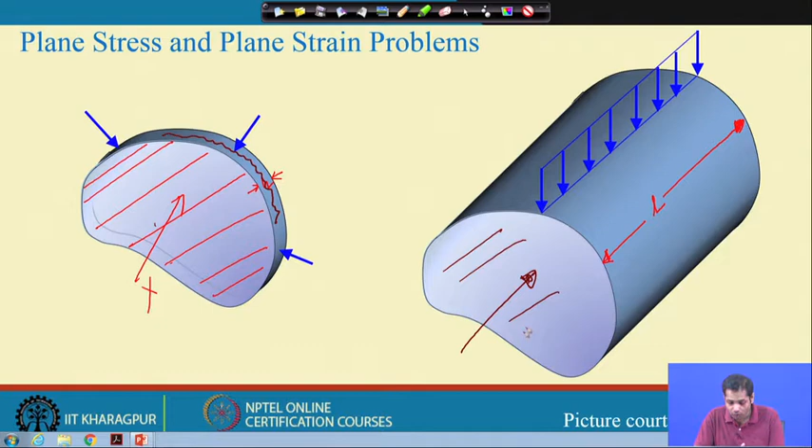Similarly, here all these loads are acting on this plane, so there is no load acting in the longitudinal direction. Again, there is no load acting in the thickness direction, meaning normal to this plane. Here also, normal to this plane there is no load. So the load is always acting in this plane. So, two things we can see.

One characteristic is that the thickness is very small, and the second is that one dimension is very large. In addition, the loading acts such that there is no load acting normal to this plane, normal to the thickness, there is no load.

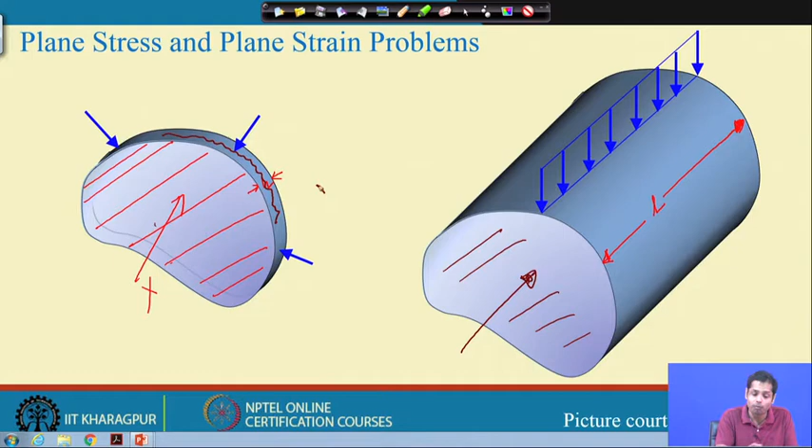For example, take a plate subjected to in-plane loading, in-plane tension or compression. The thickness h is very small compared to the other dimensions, and these loads act on this plane. There is no load acting normal to this plane. So loads act only on the plane.

Now, an example of an aerofoil. Here too, when we look at the vibration and dynamics of this aerofoil, there is no load acting normal to it, all loads act in this direction. One dimension is very large, but there is no load acting normal to it. If you apply load in that direction, things are different and you cannot idealize it as a plane stress and plane strain problem.

Now, what happens if you have a system or an object with this kind of characteristic? Let's start with the first case, and then we'll come to this one.

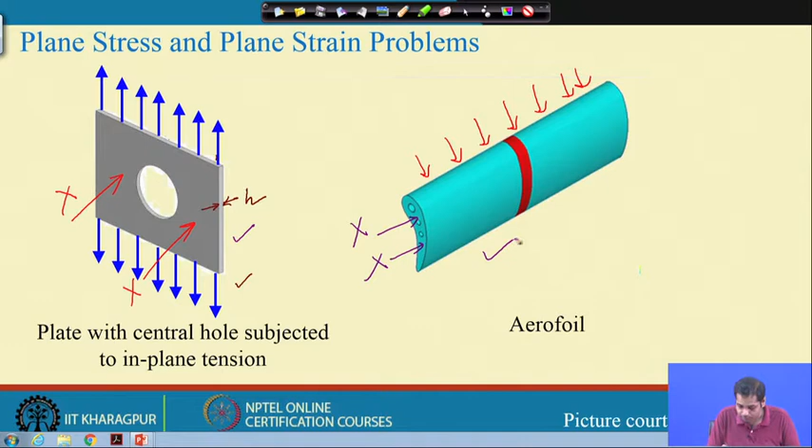Take any arbitrary object whose thickness is small, call it h, and h is very small. This is the x, y, z direction, and loads P1, P2, P3 are all acting on a plane.

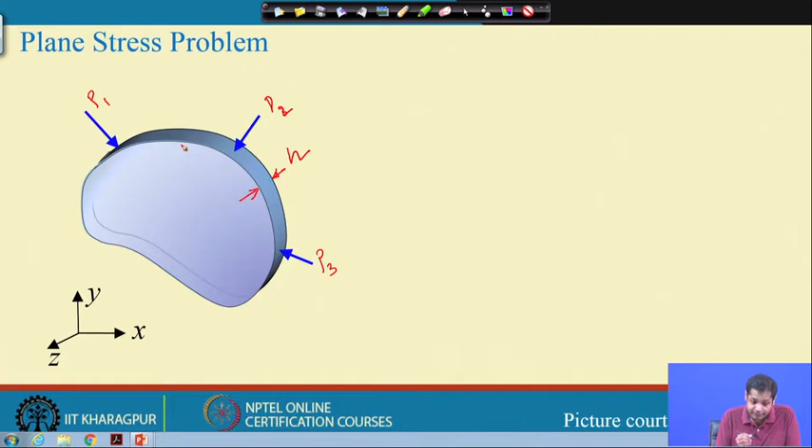Now take a small infinitesimal volume element and let us show the stresses on this volume element. You are familiar with how stresses are represented on this element, with this coordinate axis.

In this case, this dimension is very small. Recall that stress and strain have a pointwise description, so if you move from one point to another, their values change. Now, what happens if this thickness is very small? Then the change in stress in that direction, the z direction, is very, very small, so small that you can assume it is constant.

So if the change in stress in this direction is very small, we can assume it is constant. If this is constant, and if there is no stress on the surface, this surface is stress free, since we said stresses only act on this plane, there is no normal stress on this plane. Similarly, on the opposite side, there is no normal stress either, so that plane is also stress free.

So we say two things: first, the thickness is very small, so the change in stress along that direction, whether shear or normal stress, can be assumed constant with no change. Second, both faces are stress free, meaning there is no stress on those surfaces. This means that stress is constant, and on the surface stress is zero, so along that direction all components of stress are zero.

But if you apply a force on this surface, take this example of the mobile: if we apply a load like this and a load like this, on this plane there is no load in the normal direction. We only have load in this direction and this direction. So this surface is stress free and the opposite surface is also stress free, meaning there is no normal stress in that direction.

Along this thickness the dimension is very small, so there is no change in stress along it. There is no normal stress in the z direction at any point within this object. Therefore, at any point, all the components of stress in the thickness direction are zero, or small enough to neglect.

If that is the case, then this stress will be zero, there will be no stress in this direction, and this stress will also be zero. So all these stresses normal to the z direction vanish.

Now, if sigma xz is zero, then sigma zx also has to be zero, which follows directly from the moment balance equation. Similarly, if sigma yz is zero, then that component is also zero. So the only stress components we have, for any infinitesimal element, are sigma xx, sigma yy, sigma xy and sigma yx. All the other stress components are gone.

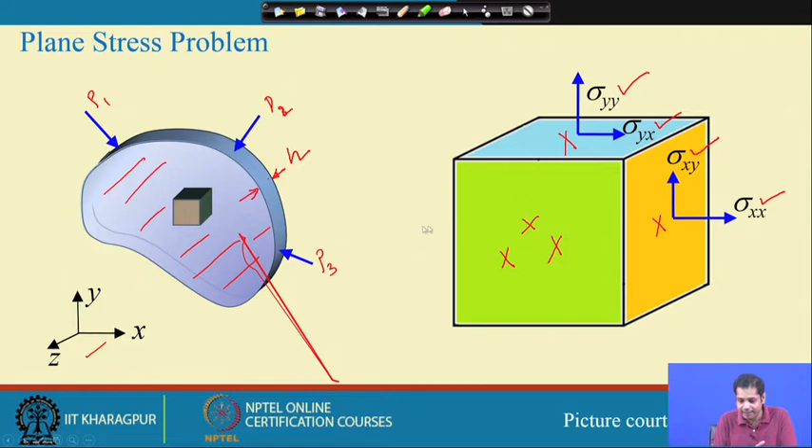Similarly, if we take the other surfaces, we again have sigma xx, sigma xy, and on this surface sigma yy and sigma yx.

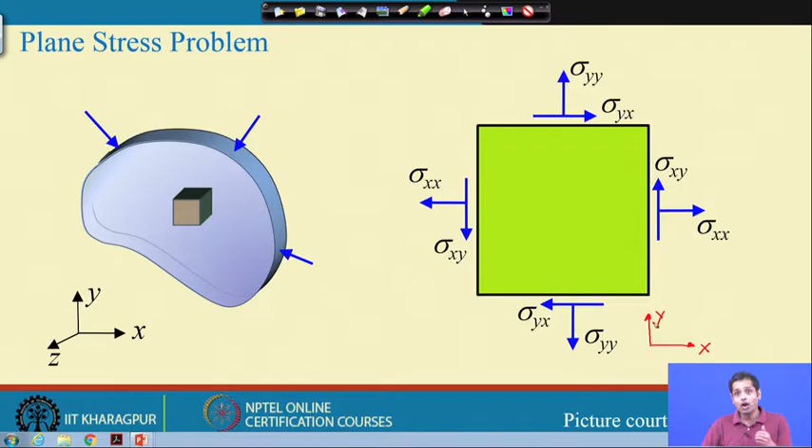So the stress state can be represented like this. Here, normal to this plane is the z direction, this is the x direction, and this is the y direction. All these stresses exist only on that plane, with no stress normal to it. Therefore, all the stresses are confined within that plane.

That is why this kind of problem is called a plane stress problem — the stress components act only on a plane. Remember, this is still fundamentally a three-dimensional problem, but it can be idealized as a two-dimensional problem. When idealized this way, the number of stresses and equations you must deal with is reduced, making the solution relatively easier.

When you make that idealization, if the assumption is actually applicable to that particular problem, then the solution you obtain reasonably represents the solution of the actual system.

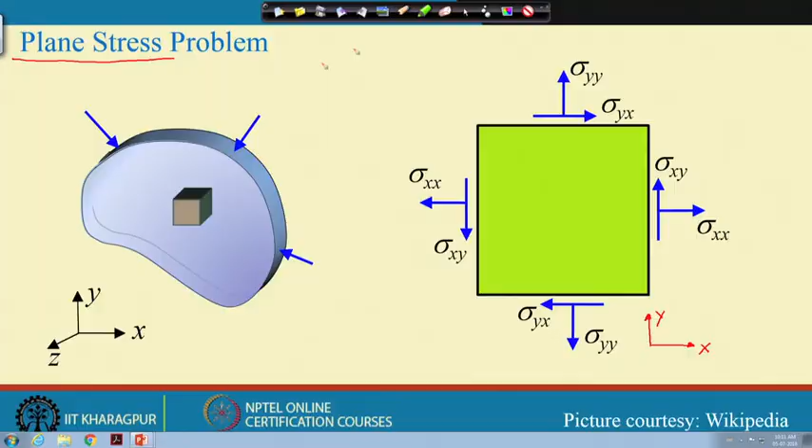Now consider another case. What happens here? Again the condition is that one dimension is small and one is large — but that is not a strict requirement. In such cases you may often find this, but you must decide whether stress and strain in a particular direction can be neglected regardless of whether the dimension is large or small. It also depends on the loading system and the kind of deformation taking place.

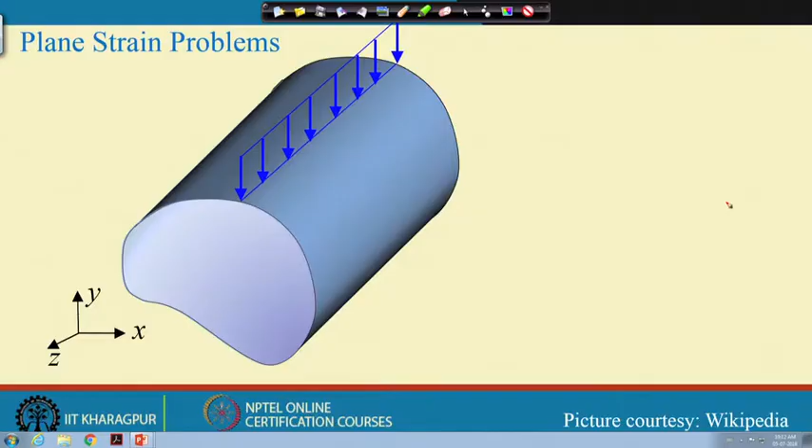Take an example where this dimension is very large. If you take a small volume element here, the strain components on its different surfaces in different directions will look something like this.

Since this dimension is very large, the deformation in this direction will be very small — strain in this direction will be small compared to strain in the other directions. So if you apply a load like this, the material will mainly deform in the other two directions, while deformation and strain in this direction remain very small.

Therefore, if the strain in this direction is very small, what strain components remain? We have epsilon zz, but there will be no strain in this direction, no strain in this direction, and similarly this will also be zero, and this will also be zero.

So what components eventually remain? All those components vanish, leaving only these strain components, which can be represented as shown. This is called a plane strain problem, because the strains are confined to a plane.

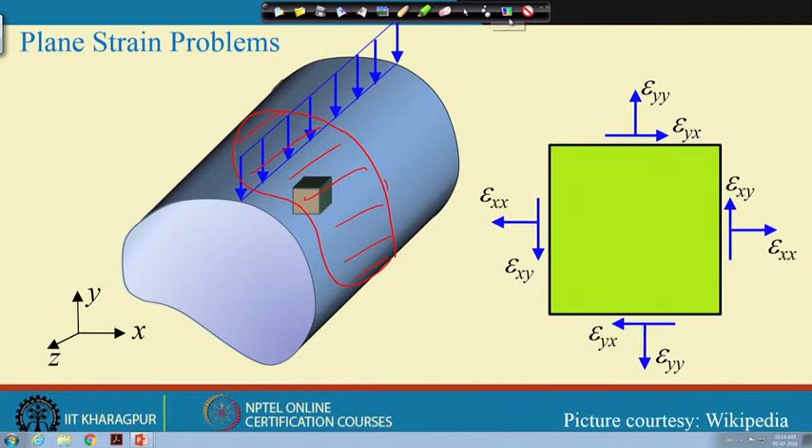When we analyze this kind of problem, instead of taking the entire problem as a 3-dimensional problem, we just take a section. Any section we take is analyzed as a 2-dimensional problem. So we have all these stresses, and if you take a small element on this section, this represents the stresses or strains on that element. This is called a plane strain problem.

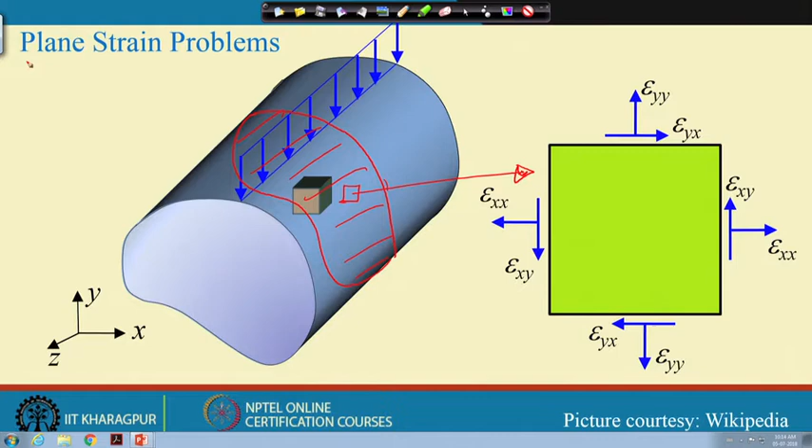Let me give an example of a plane strain problem. Take a scale, suppose it's a cantilever beam, and you apply a load like this, causing bending. This is the length direction, which is the largest in this case, this is the width of the beam, and this is the thickness of the beam.

Now if you apply a load like this and bending takes place, all the deformation occurs only on this plane, if this is the x direction and this is the y direction, the bending takes place on the xy plane. Whereas in the z direction, along the width, there is no deformation taking place. Whether you take this line or that line, the bending is the same, so along this direction there is no strain. This can be idealized as a plane strain problem.

But remember, while idealizing this problem as a plane strain problem, I did not blindly rely on the fact that one dimension is large or one is small. When you idealize a problem as plane stress or plane strain, you see how the deformation is taking place, what the loading conditions are, and then idealize accordingly. Just one dimension being small and another large cannot qualify a problem to be plane stress or plane strain. Please keep that in mind.

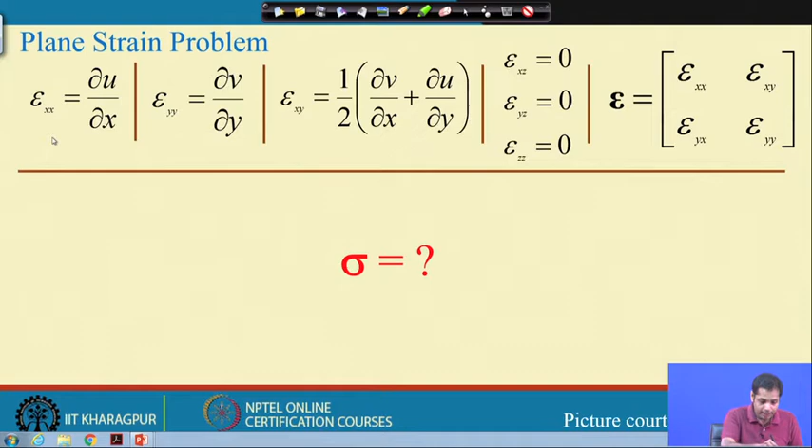Let us start with the plane strain problem. These are the three components of strain in a plane strain problem: epsilon x, epsilon y, epsilon xy. All the z components of strain are 0. So essentially you can write the strain tensor as a 2D tensor, with all other components 0 - the third row and third column will be 0, so I did not write it here. These are the only non-zero components of strain we have.

Then what about stresses? The strains are as given directly from the idealization, but what about stresses? If strains are 0 in a particular direction, are the stresses also 0 or not? Let us find that out. That is very simple - recall the constitutive relation, the stress-strain relation. Let us write the stress components using this relation.

If I write sigma xx, it will be lambda times epsilon xx plus epsilon yy - there will be no epsilon zz since it is 0 - plus 2 mu epsilon xx. So that is sigma xx. Then sigma yy will be similarly lambda times epsilon xx plus epsilon yy, plus 2 mu epsilon yy. And what about sigma xy? Sigma xy will have no lambda term, it will just be 2 mu epsilon xy. So these are the three stress components.

What about sigma z? We know that epsilon z is 0, and epsilon yz equals epsilon xz equals 0. Let us find out what sigma zz is.

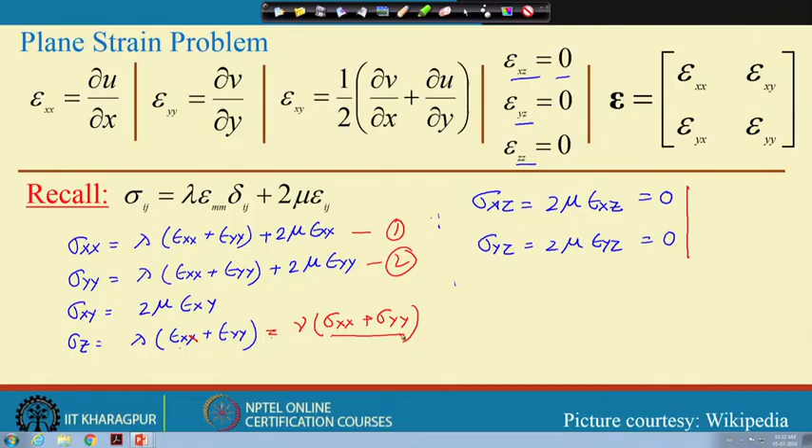Now let us look at the same thing again. Once we understand that for the plane strain problem only these 2 equations are enough, we have seen that sigma xx, sigma yy, sigma zz and sigma xy are all non-zero.

But what happens is, if we know sigma xx and sigma yy, we can compute sigma zz, and therefore we do not need any explicit equation in the z direction. So this equilibrium equation becomes this for the plane strain problem, and then you can try this.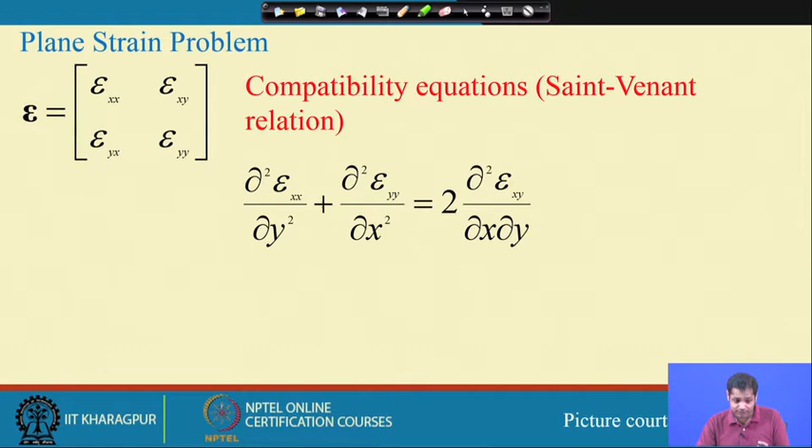Now, once we combine the compatibility equation, equilibrium equation and constitutive relation, we get this stress formulation. This is the relation we get, and if it is absence of body force or constant body force, this right hand side becomes 0. So eventually you have this. We do not need an equation for sigma zz.

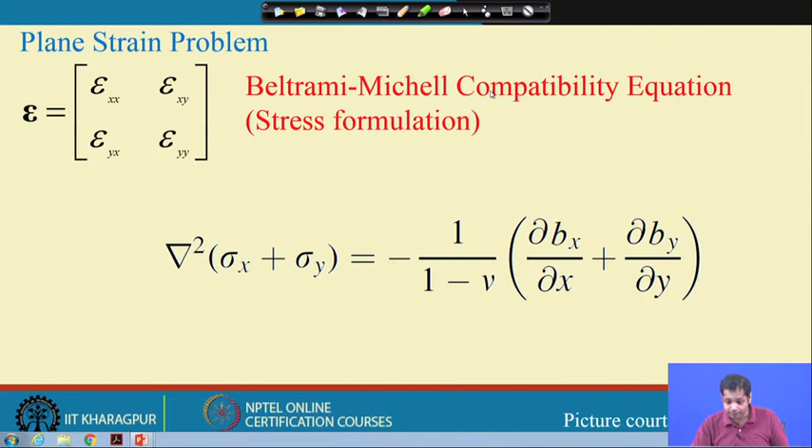Here, when we write it, this is sigma xx, this is sigma yy. So this becomes this, and similarly if you write the Navier's equation, which is the displacement formulation, it becomes this. So once we know the strain components and stress components, equilibrium equation and compatibility equation, we have a general 3-dimensional equation for stress formulation and displacement formulation. In that 3-dimensional formulation, substituting only the non-zero terms and removing terms associated with zero stresses and strain, you get this reduced form.

Now, similarly, this was for plane strain. Now for the plane stress problem, we know that all the components of stress in a particular direction are 0. So essentially your stress tensor becomes this. It is a second order tensor as written here; if you have to write it fully you'd include the third column and third row as well, but they are 0, so they are not shown explicitly.

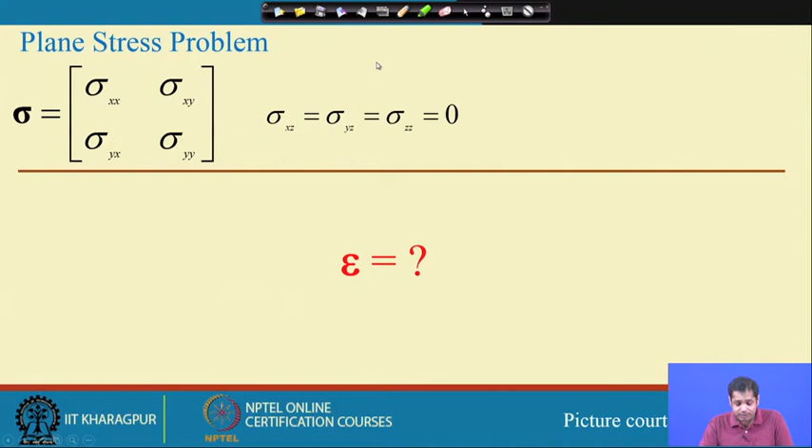Now the same question comes: what about strain in this case? We can compute the strain the same way. We know the relation between strain and stress is this. Recall, in the plane strain case, we use stress as a function of strain, but now we have to use strain as a function of stress.

So if you substitute sigma xx and all this, the expression we get for epsilon xx is 1 by E times sigma xx minus nu, Poisson's ratio, times sigma yy.

Similarly, epsilon yy we will get sigma yy minus Poisson's effect sigma xx.

Okay, and similarly epsilon xy, it will be 2 into... if you write epsilon xy, it will be 1 plus nu by E sigma xy, minus nu by E into sigma xx plus sigma yy plus sigma zz. This is sigma xx plus sigma yy, sigma zz will be 0.

Now, what you essentially have is this term will be delta ij. This is sigma xy, so for delta ij this term will be 0, so this will be delta xy. Delta ij is a Kronecker delta, so it is true when i is equal to j. So this term becomes 0, this term becomes 0, and eventually you have 1 plus nu by E into sigma xy.

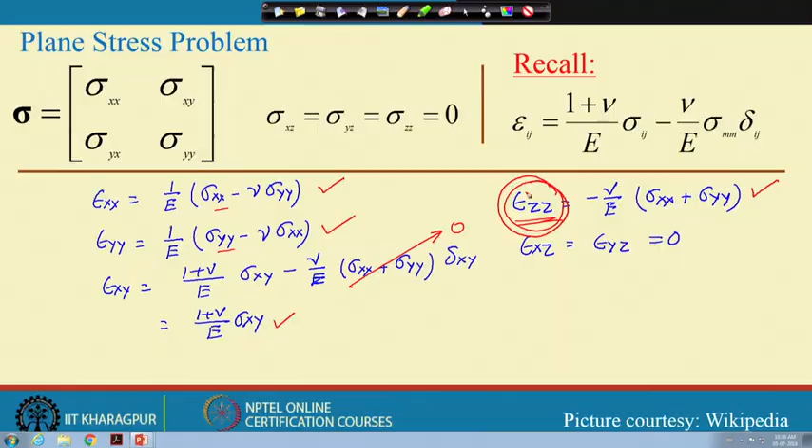Next class what we do is discuss more on this epsilon zz, and see how epsilon zz can be treated - further refinements of plane stress problems, some variants or different formulations of the plane stress problem because of this out-of-plane deformation epsilon zz - that we will discuss in the next class.

And then from the third class of this week, we will start solving some examples on plane stress and plane strain problems. Okay, stop here today.